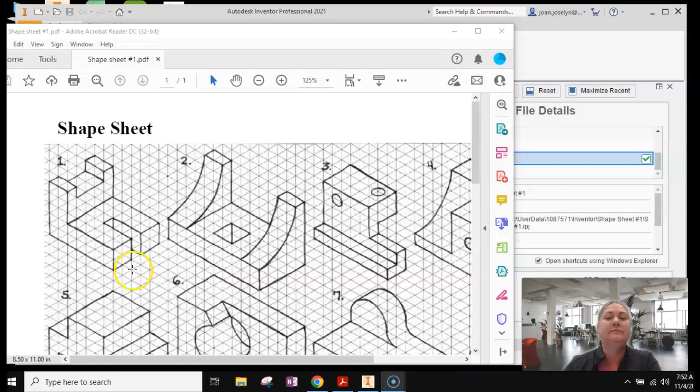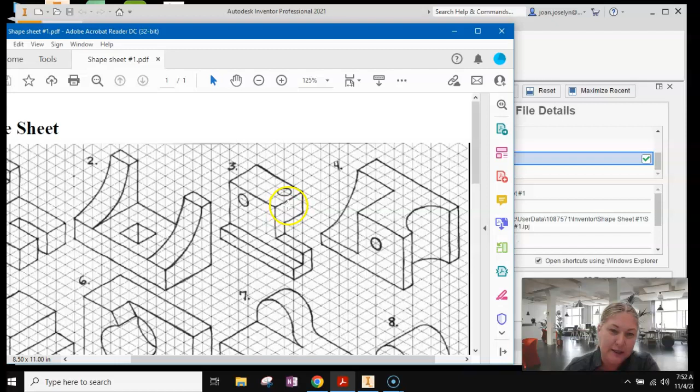Today we're going to look at shape sheet number 1 and we're going to look at shape number 3. Let's see if we can do this one in Inventor. We'll start by looking at this side right here, and we'll make the whole part a nice big rectangle.

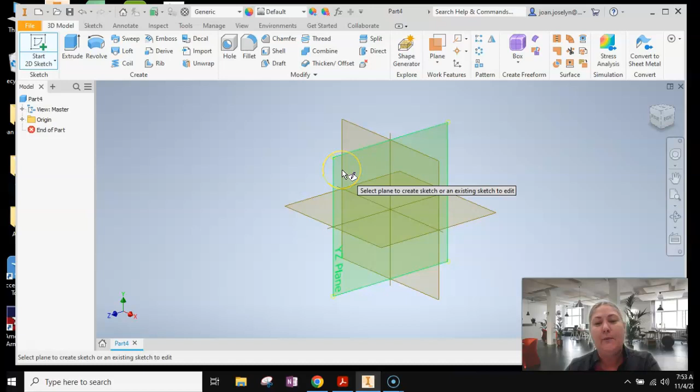Come on over to Inventor, make sure you're in the project folder for shape sheet number 1. Always use a project folder for file management. Click a new part, come up to the left side, start a new 2D sketch. We're going to choose the XY plane for today, a little change. And then we're going to pick the rectangle tool.

Rectangle tool right on the origin, drag and just drop it. Don't worry about dimensions, use the pan tool to move it over. We noticed that the top of that rectangle was 3 boxes, or 1.5 inches. Inventor could do math for you. You can say 3 times, use the asterisk, 0.5.

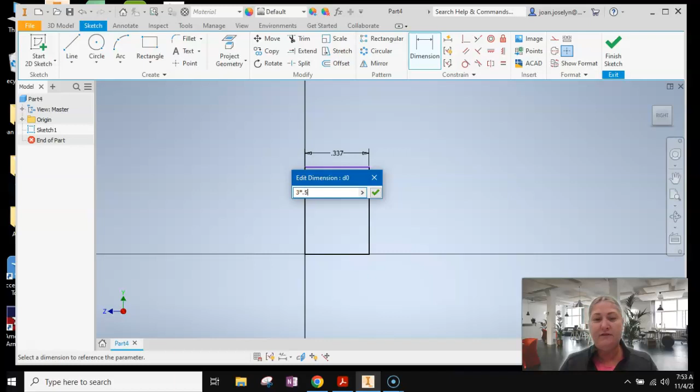That was the grid spacing on there. So hit enter, automatically does the math for you, 1.5. Kind of neat little trick they have there, right? I think going down, we said it was maybe 5 boxes, and that would be 2.5.

Let me just double check that. 1, 2, 3, 4, 5. Yeah, okay. And then we're going to bring it back just from here, 1, 2, 3, 4, 5 boxes or 2.5 inches back. Finish your sketch, top right corner.

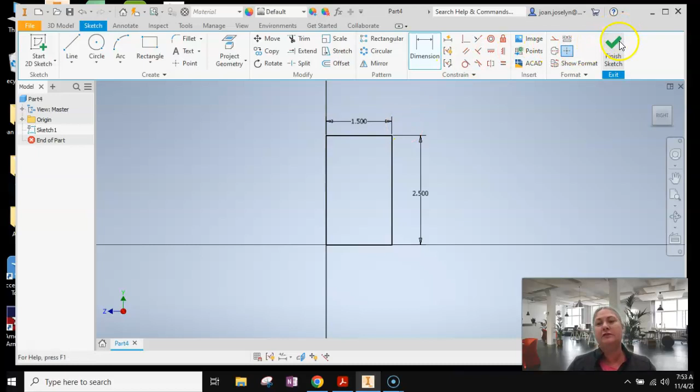I'm going to use the home button to put it in front of me. Extrude, we're going to drag it back so that we get a cut feature. Flipped, and it's - oh, not a cut feature, I'm sorry - flipped and just going back that way, 2.5 inches. I happen to drag it to the right amount, but you can type it in right here. Hit OK. Okay, now let's cut out this piece here.

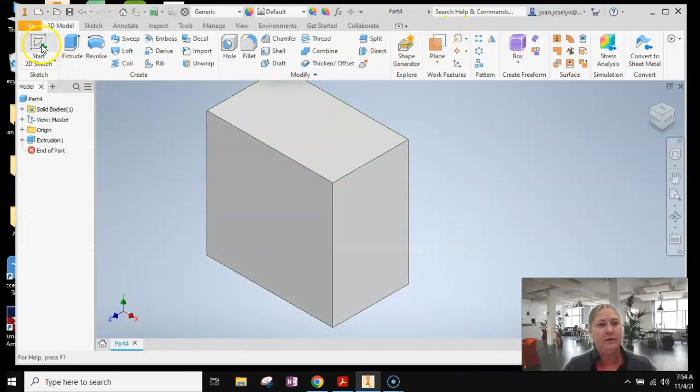It looks like it's 1, 2 by 1, 2, 3. So we're going to do a new sketch. I'm going to put it right on this profile, and I'm going to move it with the pan tool, escape on my keyboard. Rectangle tool, top left. Let's go to the bottom and make sure that it actually gets that green color that it met the bottom corner.

And it's going to be, let's see, that blue is 3 boxes, I think. So that's 1.5. And I think I forgot - let me go back here. 2 boxes, so 1 inch by 1.5 going down. Okay, let me fix that.

I'm going to hit tab to fix that. 1, tab, and then 1.5 going down. Now, if you did that and you put in the wrong numbers and you want to change it, just double click your number and then you can edit it.

If you didn't get the number and you accidentally just threw in the rectangle and forgot, grab the dimension tool, put it in, and type in whatever number you want it to be. Okay, so I made sure that I lined up here so that I can extrude. If I missed that, it wouldn't work.

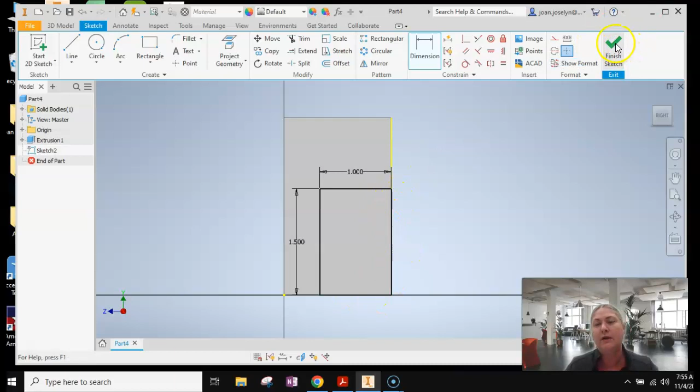Top right corner, finish your sketch, extrude, and then we're going to drag this back in the other direction. And it looks like it goes all the way through, so just drag it all the way through so you don't see it anymore. There you go, you'll see the Boolean feature made it cut. Hit OK. And then those will go away once my graphics card catches up with me.

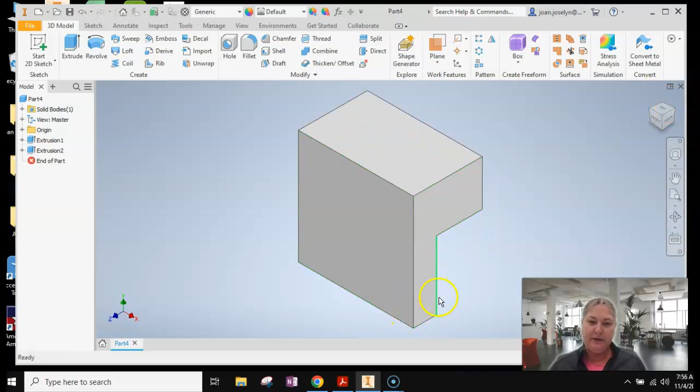Okay, so it looks like we need to add something right here that's an extrusion, and it looks like it's 2 boxes tall by 1, just this little piece right here. 2 boxes tall, it's going to come out 3, and it's only 1 box wide. So let's go to start a new sketch.

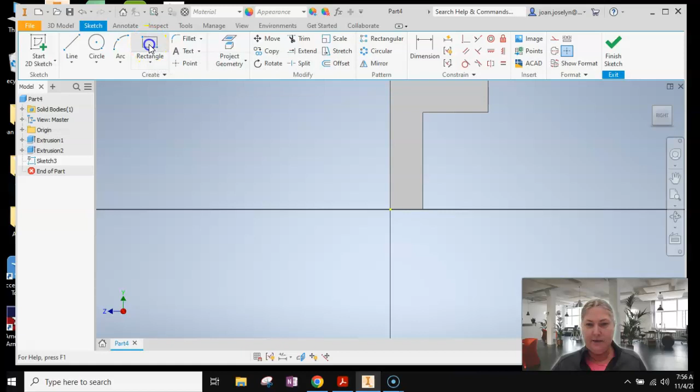We're going to click right on there, somewhere in the middle there, and then we'll use the rectangle tool from here to here. I think it's a half inch, tab, 1 inch. Let me just make sure that's correct - 2 boxes tall, 1 inch. Hit enter. That went upside down. Let me undo and try that again.

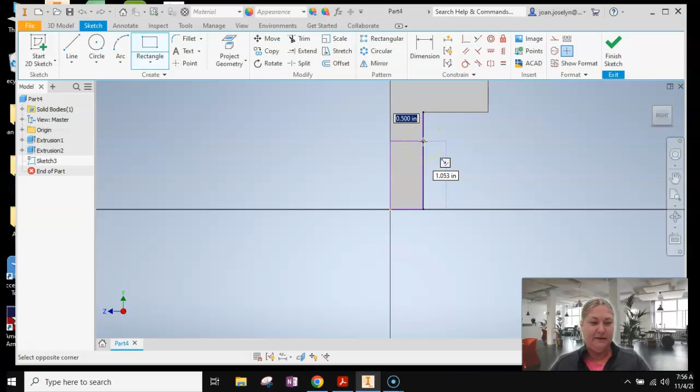Rectangle, drag, .5, tab, 1. Okay, that looks better. Finish the sketch, make sure you exactly hit that. And now we can extrude.

And I think we need to make that 1.5. So 1.5 on the little menu. There we go, that's looking good.

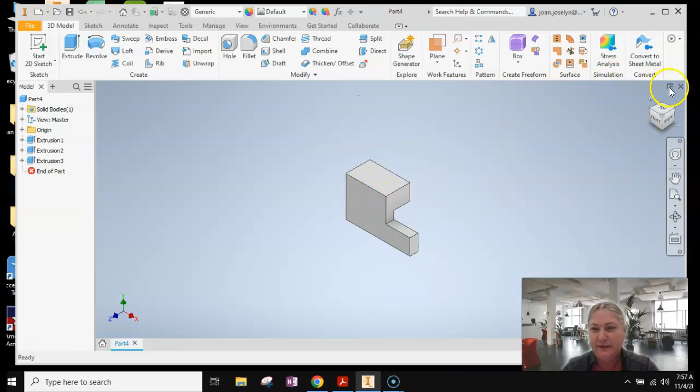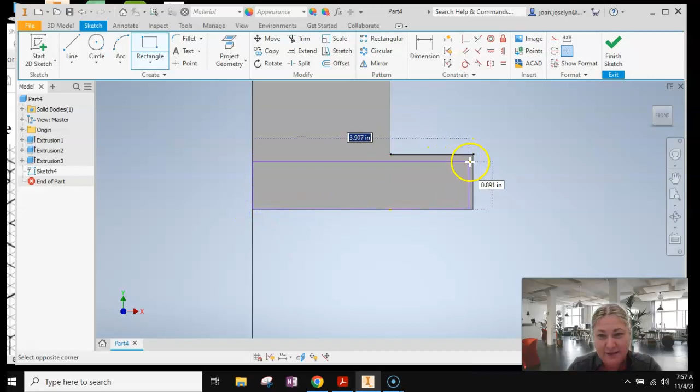Okay, so now we need this little lip that comes down here across the whole thing. It looks like this: it's a 1/2 inch tall, and it comes out a 1/2 inch. So new sketch, pick this profile now, the XY plane. And we're going to use the rectangle tool, make sure you're directly on that corner. And then it doesn't go up like you would think, it goes halfway through. If you hit the halfway mark, it actually turns green and you don't have to do anything.

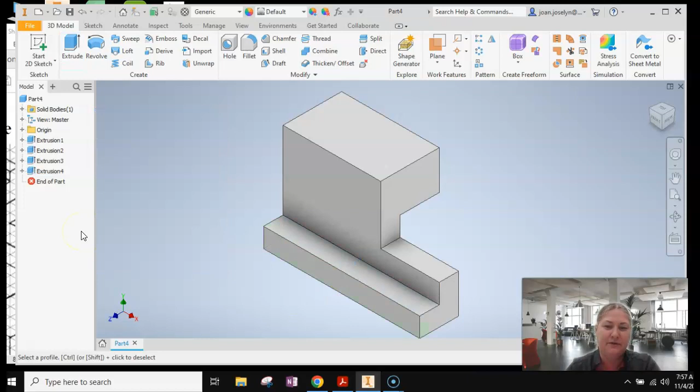4 by .5, see it pop up? Or you can use your tab button and type it in. It's kind of neat when it does that though. Finish your sketch, and I know it'll extrude because it's all black, I don't see any other colors in between. I'm going to extrude, and I want it to be 0.5, I think. Yeah, 0.5 looks good, let's see what we got here. 0.5. Okay, now we just have 2 circles to make.

This one here looks like it's a 1/2 inch from all directions. And this one looks like it's a little bit more than a 1/2 inch, that's a weird one. Okay, we'll do the one on the top first.

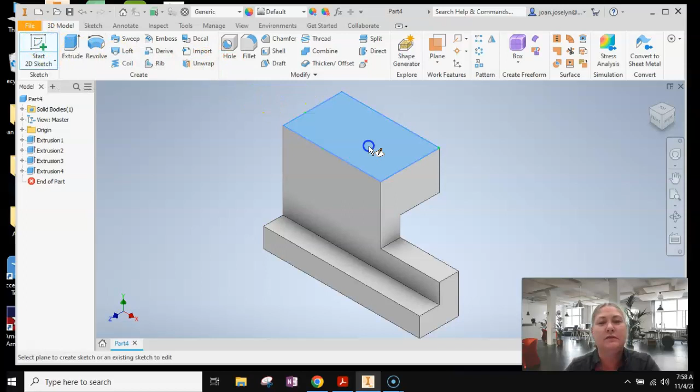So new sketch. I know you have the hole tool, but we'll use a circle, make it easier. Right on the top there, circle tool, we'll just pop it in. It looked like it was a 1/2 inch, let me just go back and check that. Because if you moved it over, it would sit in one of these, right? It's like halfway in between all those. Yeah, so we're good, I'm going to make it 1/2 inch from every edge.

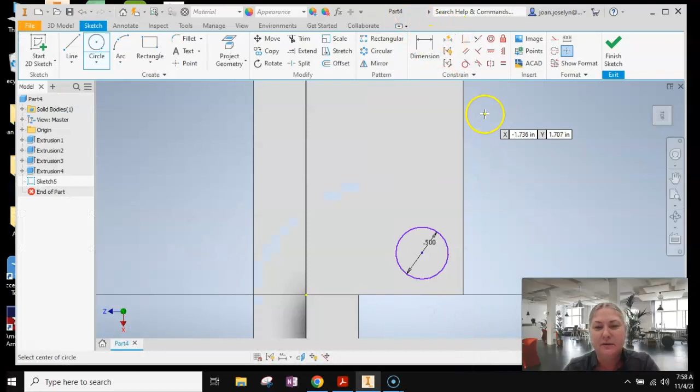So dimension tool, we'll grab the center of it and then the edge of the object and make it 0.5. And then just one more time, the center of it and the other edge of the object, and make that 0.5. That should sit just great.

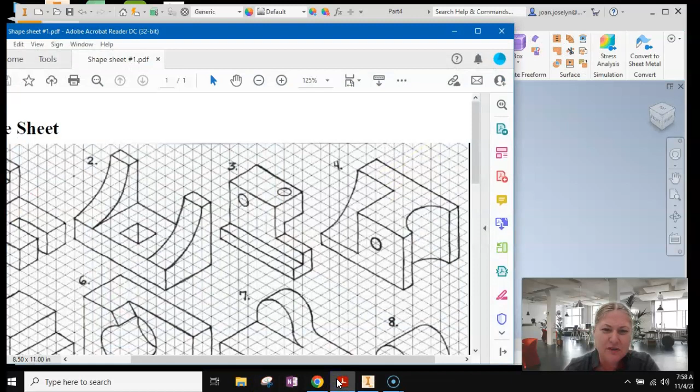I don't know how far it goes through, so we'll just assume it goes through all the way. There's no specific schematic for that, so we'll just drag down. I did the extrude tool, and I drag down. I know it's got to be more than these boxes, but as long as I see pink, I'm good. You can use the rotate tool to look at your work. Yeah, it's looking good. Okay, let's do the circle over here.

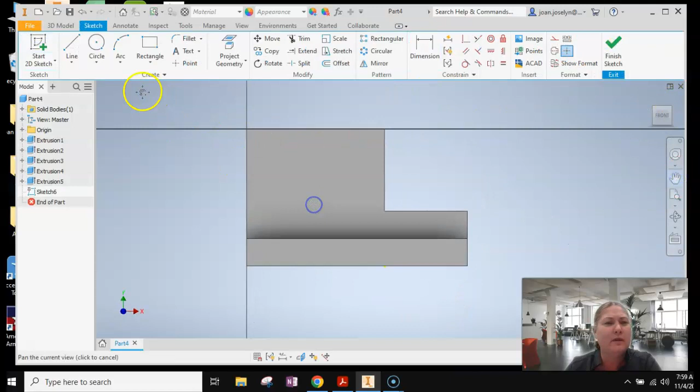So new sketch, place it on this feature, and I'm just going to throw it anywhere, and then we'll line it up. Circle, and it also looked like it was about a 1/2 inch, so 0.5. Let's see how far away it is here.

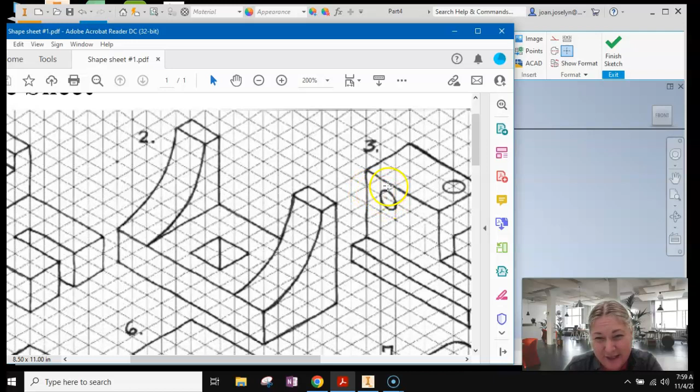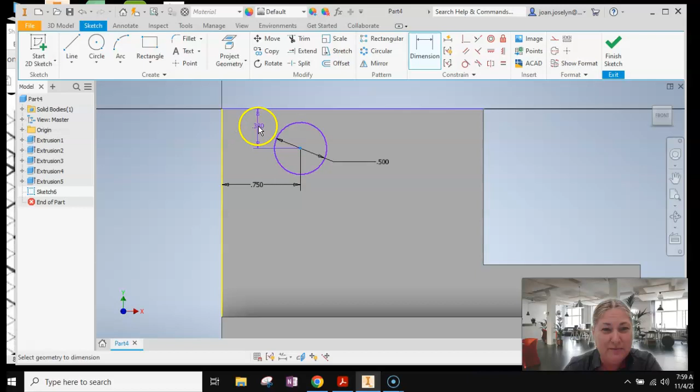It looks like it's a whole 0.5 and then another part, right? So about 0.75 away in this direction and a 1/2 inch away in this direction. So let's play with that. Dimension, I'm going to get the center of it and then the edge of my object, and I want that to be about 0.75. Then I'm going to click the center of it again in the top, and I want that to be about 0.5. And that should do it.

Finish sketch, extrude, and we want to cut. So I'm going to grab that, or I can grab the arrow and pull it through. And then we're good, click OK. Rotate tool to look at your work, make sure it goes through. That's a neat part. Okay.

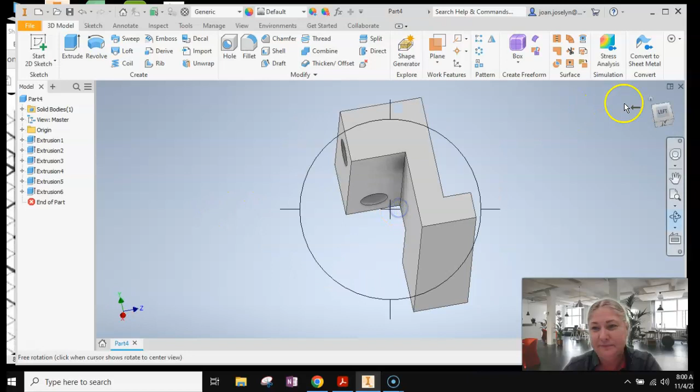Home tool, give it some color, have fun. Use the adjust button, move it over anywhere from the left and drag across, let you do all at once. And then just slap a nice color on it.